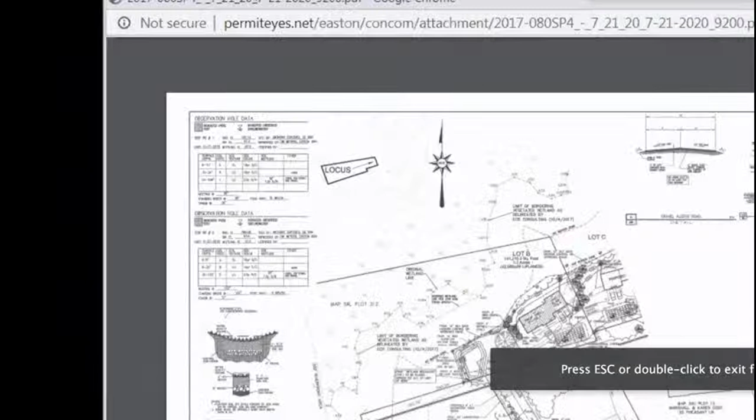As you mentioned, we had a conservation meeting back in January, but after that, we had a meeting with the Conservation Commission where they reviewed and discussed the plans, and we did a drainage analysis associated with the dam on the northerly lot. After review of the documents and discussions with the Conservation Commission, the commission agreed to let the applicant remove the boards within the dam structure. Those photographs and inspections occurred, and a letter was sent to the Conservation Commission, uploaded as well today, regarding that particular part of the adjoining project, if you will.

So as you mentioned, back on January 6th, we were before you with this particular project, and there were some issues. The project was continued once until we resolved the issue with the dam. So here we are back before you, and the issues that we did address that were requested was a cross section of the gravel access drive, and that was added to the plans as well.

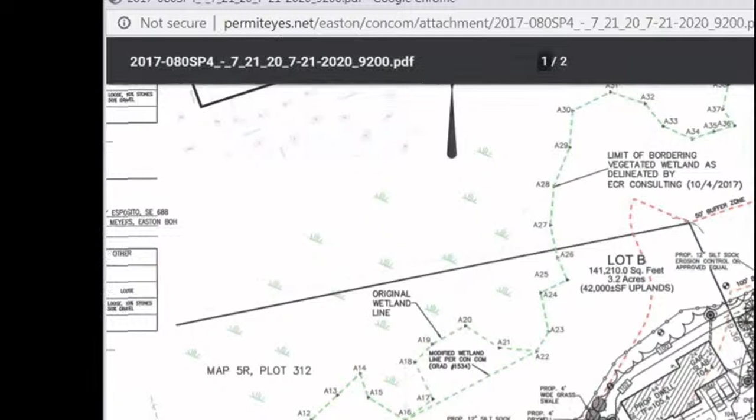There was a comment, I believe, that was made about snow storage areas, and those were added to the plan. Unfortunately, they are on the eastern side of lot C, if you will, so they're kind of at the end of the drive, and they got cut off on this particular plan. But the idea being that the snow would be pushed down the drive towards the end of lot C out of the buffer zone.

A bunch of work was done to create a bioretention area on the project that you can see there. Originally, it wasn't existing there at all. We added that, and then at one point we enlarged it a little bit to accommodate a bigger storm event. So that's been shown and designed to accommodate the increase in existing stormwater flows.

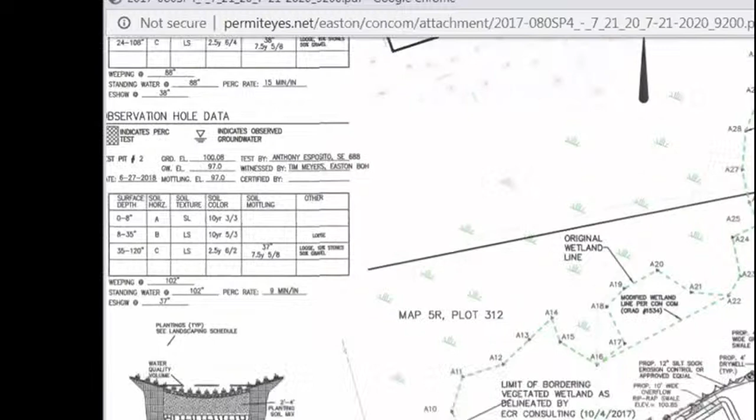And then one of the requests that was received that night was to do a tree inventory plan. We did do that survey, and we provided that plan to the commission. It should be noted there are 30 trees that need to be removed with the particular project here for this lot, 10 Gilberta Way. But we also are adding 13 trees back into the project, and there'll be additional plantings that will be installed along the proposed common drive next to 20 Pheasant Lane. So with that, I'd like to answer any questions that you may have.

Anybody have any questions, or is it just frozen?

I can't hear you. Yeah, I was frozen. Oh, okay, there you go.

So just as a bit of a summary here, we've got the stormwater addressed, the retention basin to handle some of the runoff as well, additional amount of runoff. The snow stockpile area has been designated, although it's not on the plan. It's described. And we have a description of the removal of the trees, as well as some of the replacement that you're doing as well there, which trees are remaining and which are being removed, and you're adding in some trees as well. Is that about it? That's it. Yeah, correct.

Anybody have any questions, Mr. Rogers? Well, I guess as far as the plantings go, and I'm assuming Carol's probably going to touch on this, just with some of the experience that we've had with plantings kind of going sour, particularly recently on some projects. Do you guys have any specs for plantings and making sure root balls and everything are at the correct depth, and there's the right soil and mulch being used around the plant bed to ensure success?

I spec'd out the botanical name and the common name of the plant materials and the sizes. If you guys need me to provide details along with that as far as how you plant the trees and shrubs, I certainly can do that.

So let me see if I'm reading this correctly then, Scott. The 4 trees that are being saved are the 2 over here, these 2 green ones. Correct. What are they? Those are oak. At what size? I believe they're 18. It's kind of hard to read the plan. I believe they're 18s. Okay, and then this one's being saved? Right, and that's a pine, and then this one. Correct. Okay, so the trees that are being saved have the cross hatching inside the circle? Yeah, exactly. Okay.

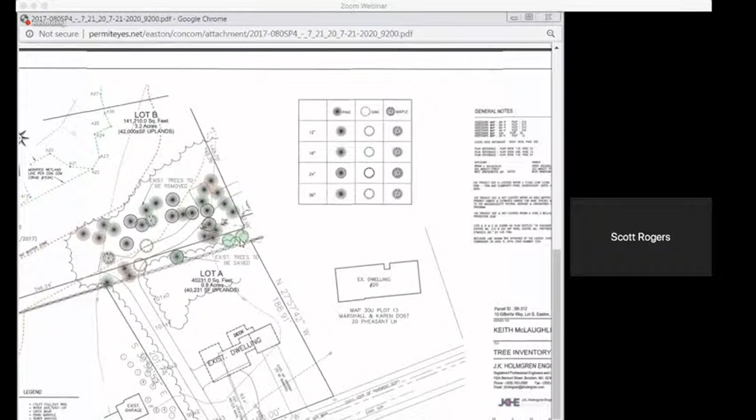Sorry to interrupt, Andrew, just wanted to clarify that. I'm looking at the plan. There's only 4, right? Correct. Any others being saved? No. Okay. I can add that level of detail. Okay, so, any other questions?

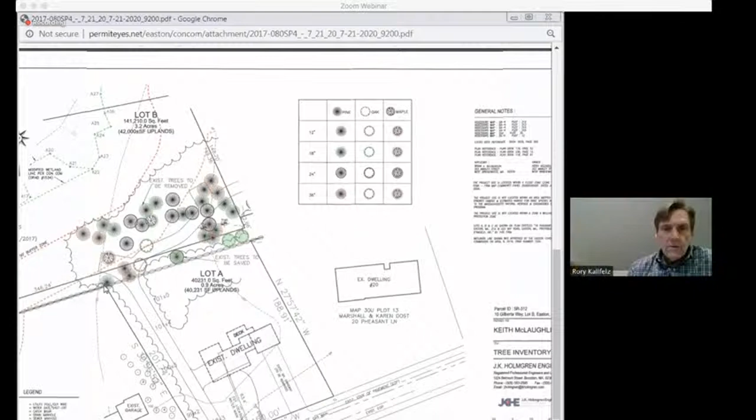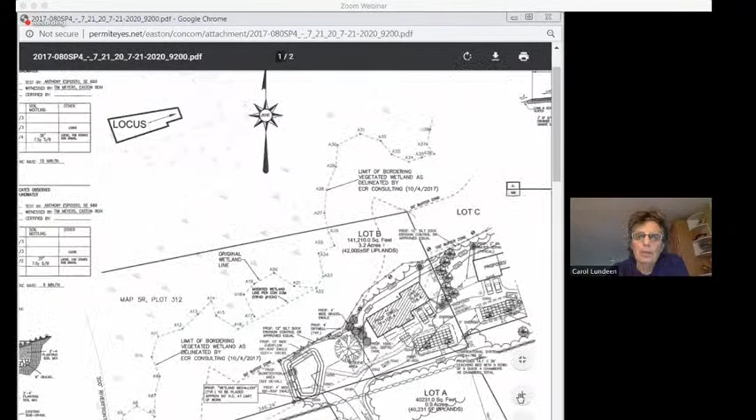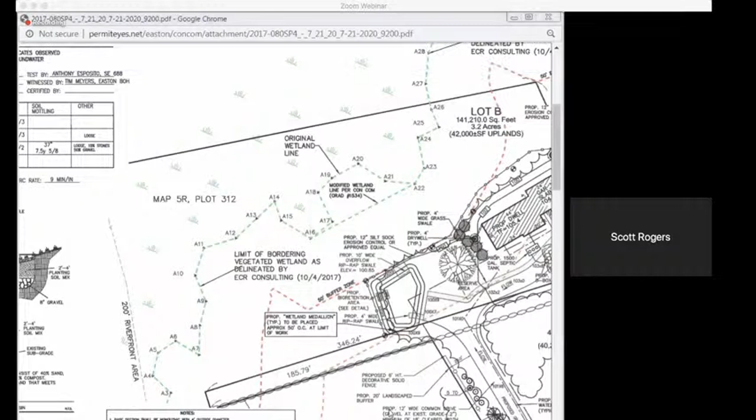Right, this is Carol. I'm a little rusty on this one. Do we have any shrubs going in or ground cover? So, first of all, Carol, did you sign a Mullins on this one? No, you don't need a Mullins on this one, okay, that's good. Making sure before we get too far. Go ahead. Right, so Scott, what do we have for shrubs and ground cover going in? So, in the bioretention area, we have some shadblow, some winterberry, sweet pepperbush, arrowwood, and sensitive fern.

Wow. And what's the maintenance plan on those? Monitoring? I would assume that, I don't know if it gets put into the standard conditions, but we'd have to plant at a decent planting time. And then I would assume the commission would want to see some kind of an inspection a year later to see if we had a survival rate. And if we didn't, we'd probably have to replace, I'm assuming. That's pretty typical, but I don't know if you guys put those into your conditions or not.

Right, so you're saying that you're not coming forward with a maintenance plan? No, it's a single family house. Right, okay. So anytime the soil is disturbed, anytime soil is brought in, there's a very high chance of exotic invasive plants popping up aggressively. And then there's the whole issue of getting these plantings established. I'd like to know what the establishment plan is, how they're going to be watered, especially now, even though the Massachusetts drought map that comes out on Thursdays has shown us not to be in drought. It sure seems like Easton has been missing a lot of the little bit of rain around.

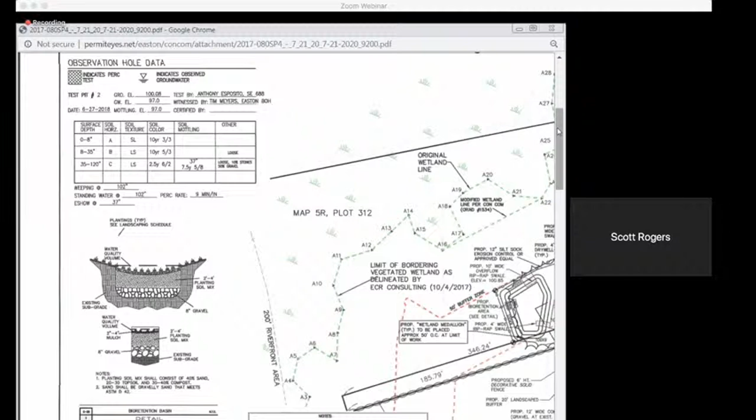So I'm really rooting for these plantings to be very successful, and they're going to need a lot of help to be successful. So I don't know the exact construction schedule, but even if we were to proceed this fall, we've got to get a permit from this commission. We've got to file for a building permit. We've got appeal periods. So at the very earliest it would be fall, and at the very latest, the planting would have to occur in the springtime. So we prefer to do it when there's better conditions than August 3rd to plant. Of course, yep. We'd all like to see that.

So I'm kind of interested in seeing an establishment and maintenance plan. Yeah, and I know my memory is a little fuzzy because I've been out of action for a few months, but I don't think that requiring maintenance plans is that out of the ordinary for this commission for single family homes and clusters of single family homes. Is that correct, guys? I think it would be appropriate, given the kind of planting they're gonna do.

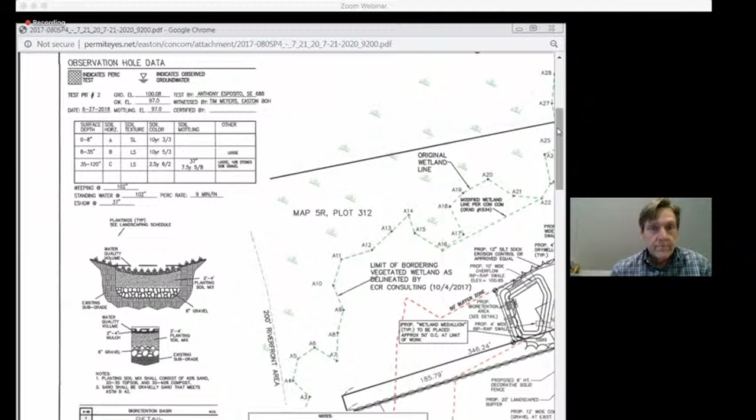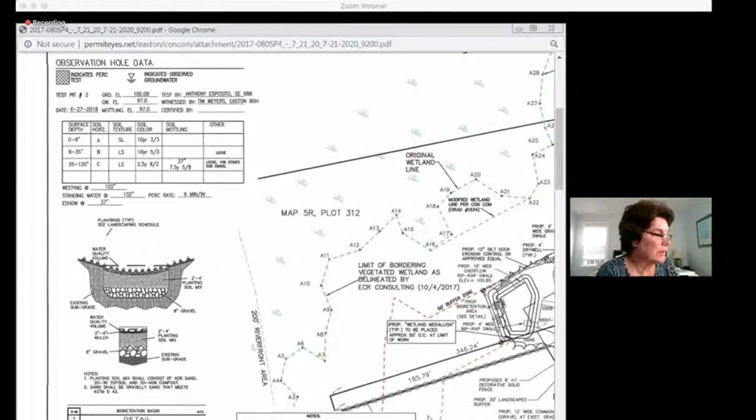Scott, I'm also not seeing, there it is. Okay. I'm gonna bring over the landscape plan details so that Carol and other commissioners can get a good look at it. I'll try to enlarge it because clearly I missed seeing it on the screen. Okay, so here's your schedule. There's your size.

Nice. This is the guy to ask questions of. He actually knows what he's talking about. Yeah. Thanks for bringing those forward, Andrea.

So, I think we should just have them give us an establishment planting plan and an establishment and a maintenance plan. Normally, do we look at it 2 years out, Andrea? Two seasons? Your choice. It's either 3 seasons or 2 seasons, whichever is likely to get 75% survival. Yeah, and we generally provide that, right?

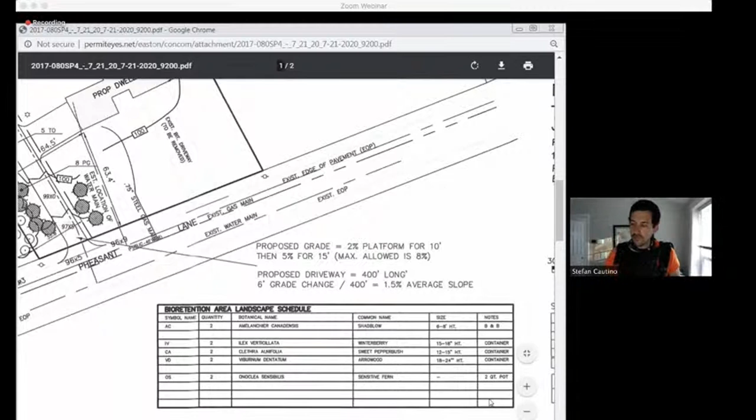The maintenance plan itself, and then I guess there's the question of do we want any specific plans around the actual planting of the plants, or do we want to reserve that for restoration areas and that kind of thing? Right, I agree. I would like to see a description of the planting methods that will be implemented.

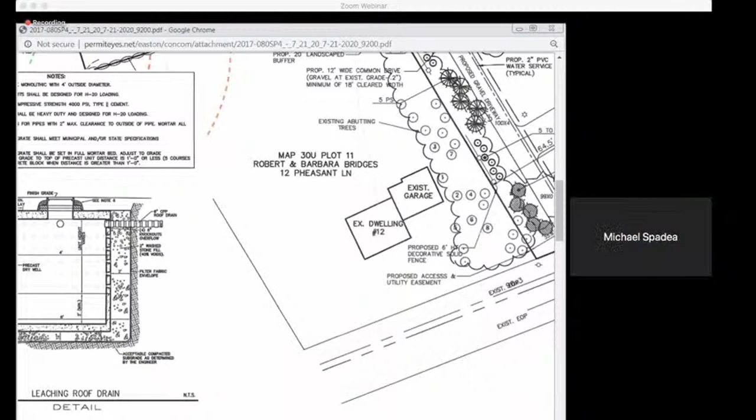Well, I think part of this is that they're on the hook for the survival rate no matter what they do. That's my approach, they have to be on the hook. Yeah, whatever plan they have, it makes no difference. Got to stay alive. Yeah, at least 8 of the 10 plants that they're planning on putting in there need to survive.

Yeah, so Scott, the discussion we're having now around basically showing a cross section of a plant in the ground, the right depth and mounding and everything like that, is because we've had a lot of plantings that have just been installed terribly. It creates more work for you guys, it creates more work for us, it eats up time on everybody's plate, and then you gotta go and plant more things. So it's almost like a fail-safe for you guys to make sure that whoever's doing the installation has a spec to work to.

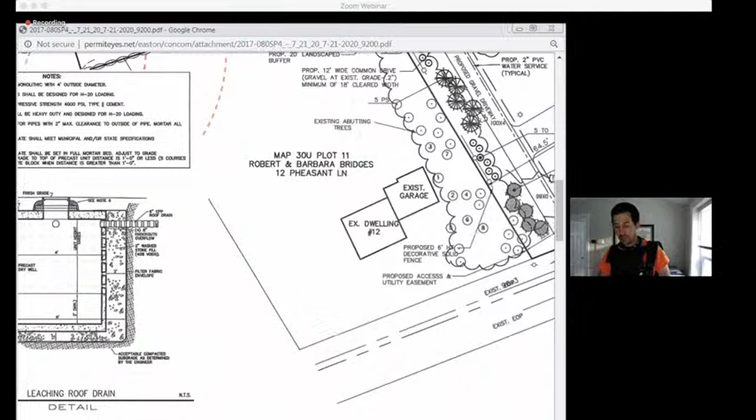I guess if you feel that the contractors you use are going to do the installation of the plants correctly, you're going to have to follow the maintenance plan. So, you're the engineer. I come from an engineering background. I like to have plans. But it sounds like the commission would lean towards leaving it in your hands as far as if you want to provide that kind of a detail.

You certainly could. And one thing I would like to point out is that we did do a set of plans for the planning and zoning board when we did the approval for the special permit on Pheasant Lane. So we may have already presented those details to the town, just not to your specific commission.

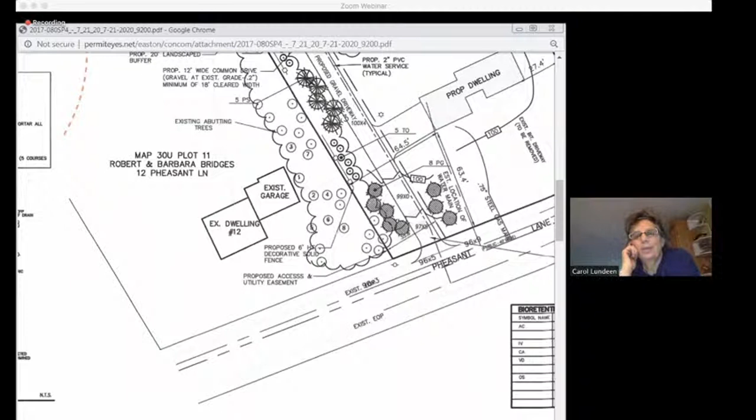Right, Stefan, I would like to add to what you were saying about the higher the survival rate, the less of everybody's time it takes up in the future. There's also the aspect that the sooner these plantings become established, the higher chance we have of having a functioning ecosystem. True. Good point. So that's also super important. For me, having an annual reporting feels kind of risky. I'd like to see more skin in the game, more active management in a plan.

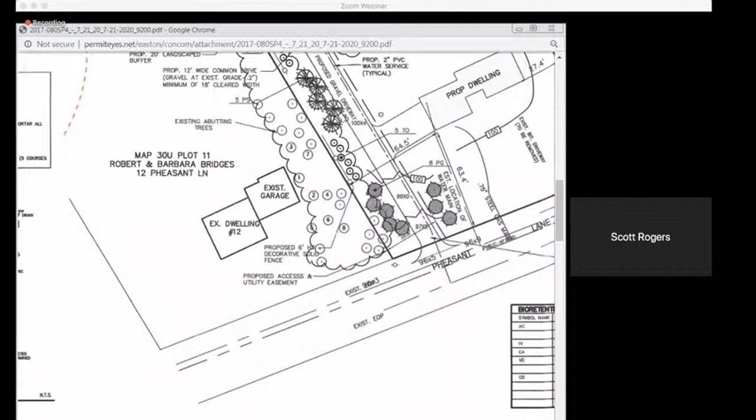So Scott, let's see what you can come up with. So is this something that we are doing on every single family house now? We're doing maintenance plans and we're monitoring things. Don't forget, I'm not filling in wetlands. I'm not even doing buffer zone restoration. I'm basically providing a bioretention area that's not required by anything other than the Easton Conservation bylaw, and we're doing it at the owner's expense for additional stormwater control, which is not really required.

But it is required by the town bylaw, so it is required. That gets glossed over a lot of times, and it drives me nuts. You guys work with different towns, but you're working in the town of Easton, it's a bylaw, it's a requirement in the town, even if it's not at the state level. And yes, it is something that we require regularly on single-family homes, the maintenance plans. This isn't anything out of the ordinary. All right.

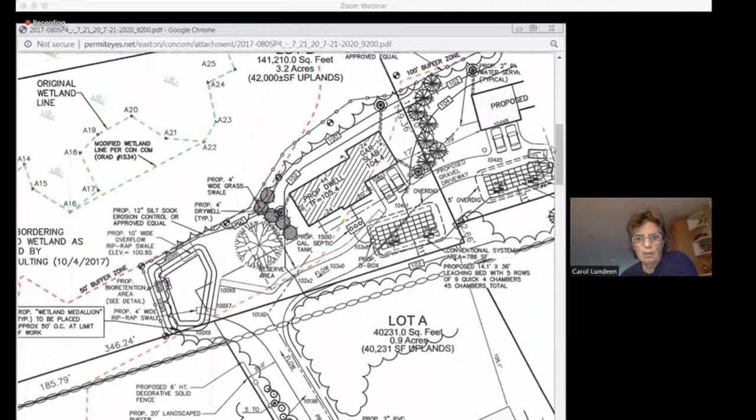Right, and in addition to the plantings in the bioretention area, we have new trees going in up in the area where the trees are coming out. Correct. Okay, so I'd like to seek some kind of report or schedule about those also.

Well, if we're doing the maintenance plan requirements, we can require that. So Andrea, typically we do annual reporting. Yes, they go in the first growing season. You often have a report on how the installation went, and then you often get a report after the next growing season and annually after that. Okay. But sorry, Carol, does that sound reasonable? We have a report on the installation basically a quarter later, three months later, and then annually thereafter.

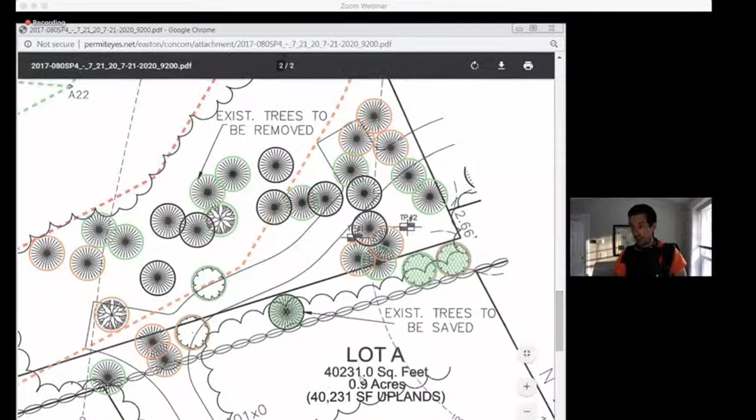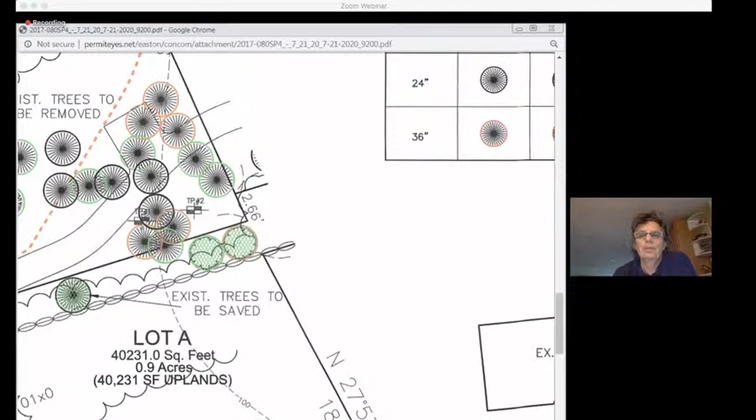Right, to me it doesn't seem frequent enough, especially during the first establishment year. I know, Scott, you were thinking of maybe doing planting this fall or in the spring. Anything that goes in the spring, if we have another summer like we're having right now, what I would like to see is new plantings irrigated with just a surface Netafim drip line on a timer, something like that. Just to show an investment in the restoration of the ecological function.

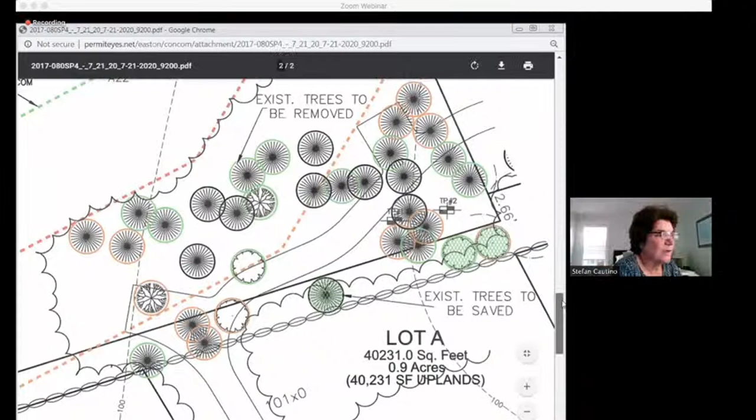Don, did you have a comment that you wanted to make? Yeah, I just wanted to reiterate that we only have jurisdiction within 100 feet of a wetland. So the trees that would apply would only be within our jurisdiction. Good point, John. I also would like to note that the shrubs are going in a bioretention area, so all the surface runoff is being directed toward them.

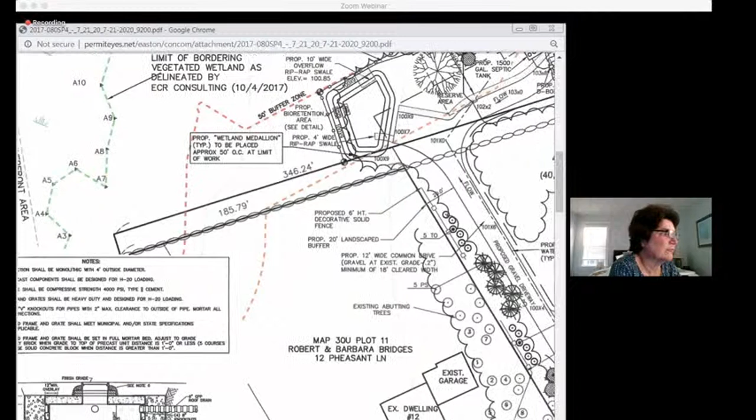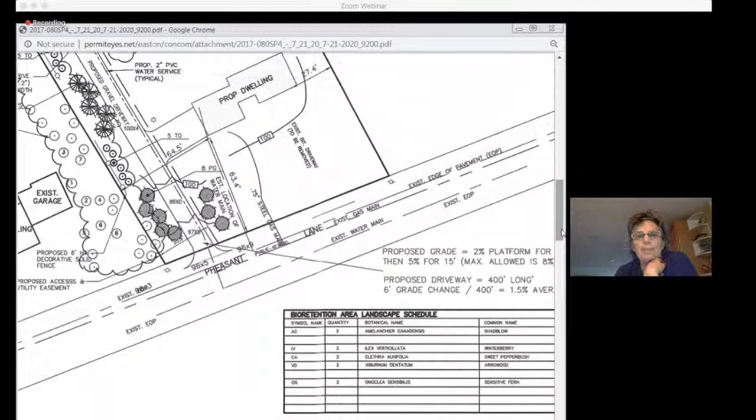Yeah, but also, thank you for all that. I'd like to see not just getting the plantings established, but what happens when the invasive plants come in. How will they be managed? I guess the one question we want to ask Scott also is if he identified any invasive plants out there. I believe Brad Holmes was the one that did our wetlands flagging. I don't believe he did note any invasive species out there. So no bittersweet, no Japanese knotweed. I don't believe so. Okay.

It's been a while since I was out there for the ANRAD, but I don't recall seeing any large patches or anything of that. It didn't jump out at me either. I'm not saying it's not out there, but it wasn't in some large area at least a year ago when the ANRAD came up.

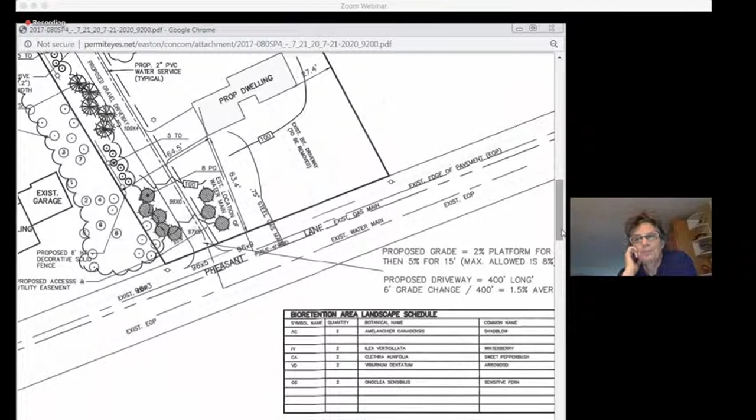Another thing that's come to my attention recently, I'm not sure what kind of soils will be used to construct the bioretention area, but on its surface, I've become aware that it's an option to bring in certified weed-free soil. So that's something that I would like us to consider. John, what are your thoughts about that? Weed-free soil, as in what type of soil are we talking about? There's some kind of certification process where the soil is tested and shown to be weed-free, weed seed-free.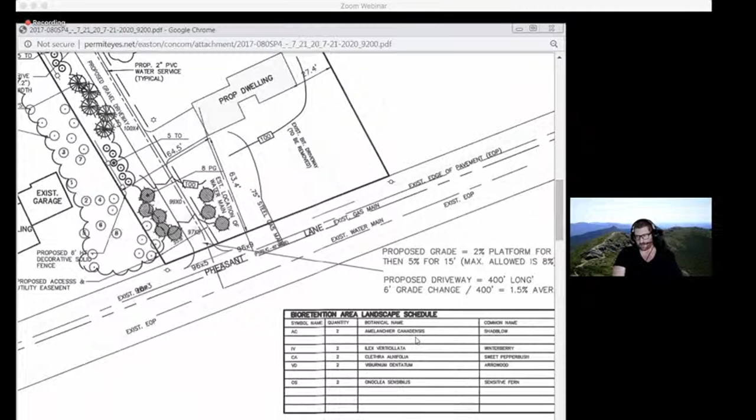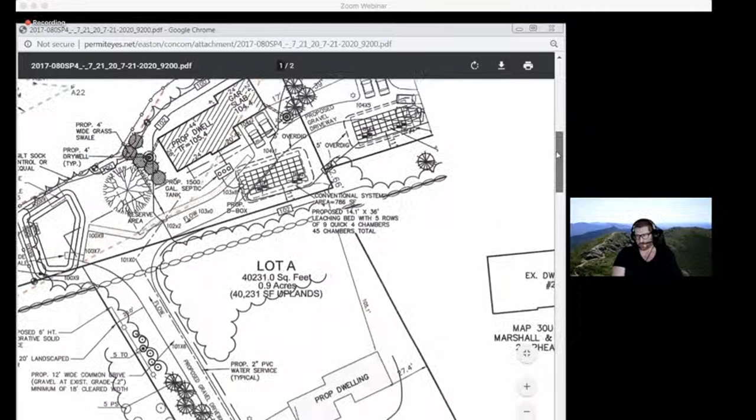How costly is that? That's a good question. How costly is that? How valuable is it? Is that something I want a single family owner to really have to fork over? If it costs thousands of dollars, I don't think that's something you can ask of the landowner. But if it was a large wetland replication area or enhancement area, I would say that would probably be something that we'd be more interested in looking at. Right. I appreciate we don't want to burden homeowners, but we also want to have a high functioning system as soon as possible. I understand. It's easier to maintain.

So my thought is that we need to either condition it or put forth in written form on the plans a planting plan and a maintenance plan. I don't believe that I need some of the more detailed things that we haven't done before being suggested here with this particular project. So I think the annual maintenance plan that we've always done is sufficient from my perspective. So.

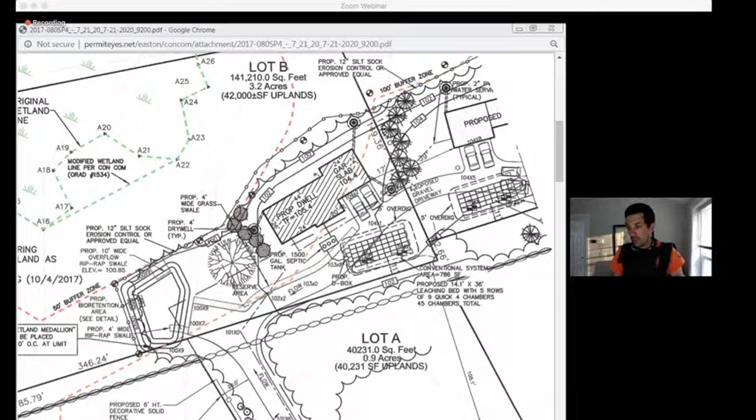I'd be comfortable leaving it up to the applicant, just knowing that they have to meet the maintenance requirements. Leaving the plan as is for that, and I'm okay. Personally okay with him adding that detail and getting it to Andrea post approval, getting the permits pending, adding that detail and getting it over to Andrea. Okay.

So let me see if there's any public comment for this particular project, you can either raise your hand or use the Q&A box. Hand raised, promoting to panelist, Ms. Hooker. Okay, Ms. Hooker, you can unmute yourself. Can you hear me okay? Yep. Okay. So Pheasant Lane obviously still a huge concern with the water. Just for the public record, can you identify yourself? Oh, yes, sorry. Erin Hooker Thomas, 4 Pheasant Lane. Thank you. Go ahead.

So obviously still a concern with the water. Now that we have the elevations of what they have on Brentwood, Pheasant Lane, I had my elevation certificate and I'm happy to share it with you, Rory, and everyone else. My elevation is 160.40. What was that? 160.40. Do you mind sending me a copy? Absolutely. Actually, I'll do it on my phone.

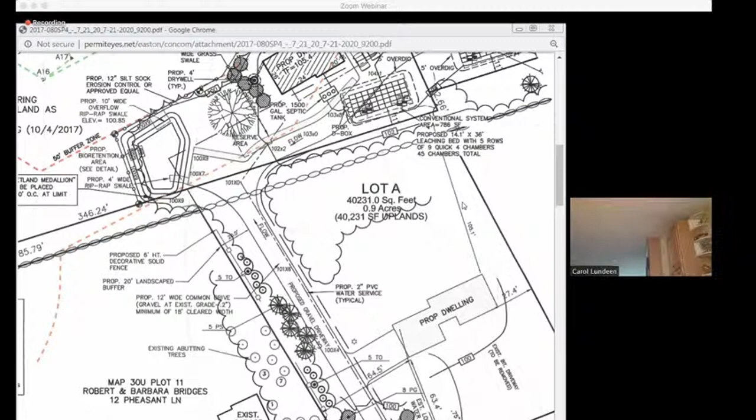If you recall at the last meeting on the dam, she made reference to the fact that she had an elevation certificate from FEMA, which caught me as odd because on their own FIRM maps the area is considered outside of flood zone. Do we have topos on this? We don't, right? Did we ever ask for topos? Oh, we have topography shown on the plan. Which version? Show it to me. Oh, it's a very light layer in the PDF. Very, very light.

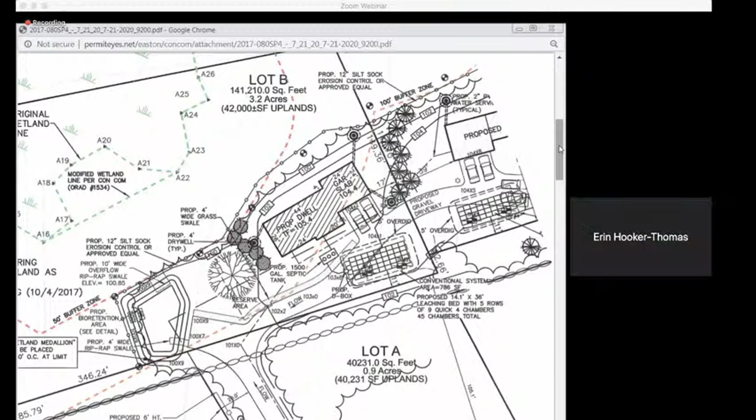Whoa. Is this an assumed datum? It is. So this isn't tied into any sort of NGVD or NAVD datum. It's not. All right, Andrea, I just sent it to you. So an assumed datum with land subject to flooding nearby. You might want to have some sort of calculation as to how to compare the two.

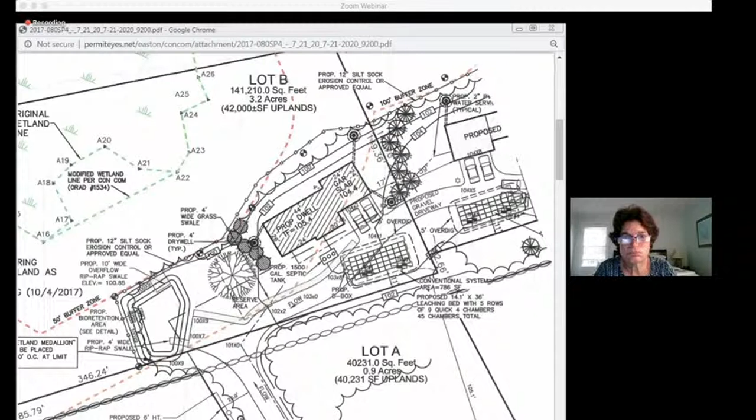Yeah, because I'm kind of concerned that we are significantly low, and then we're taking out 30 trees on top of that. I already showed you the picture that we have a lot of water that comes from that uplands. And now I'm really concerned because we have the boards being removed that were X amount of feet, and now more water from trees being removed coming down our direction. I already have a French drain. I can't do much else to my house.

So just to clarify, the boards resulted in a little over half an inch elevation change in the water, not feet, and it is 1,500 feet away. I just want to be clear on the record. I'm not minimizing the water problems in this neighborhood because it is an absolute issue. Right. And I'm just concerned because we are 15 feet lower than that area. What's that going to do to the water coming in our direction? Well, did you say your elevation was 160? Yep. Or are you referring back up to the dam at Brentwood?

Yeah, the dam at Brentwood, they had elevations of 176 down to 174, but my elevation's 160, anywhere from 160 to 166. I'm a little concerned that we're so much less, and that would make sense why we have water that just sits on our street even days after it stopped raining, which causes issues obviously in the winter. And now we're removing more trees to send more water down to our street.

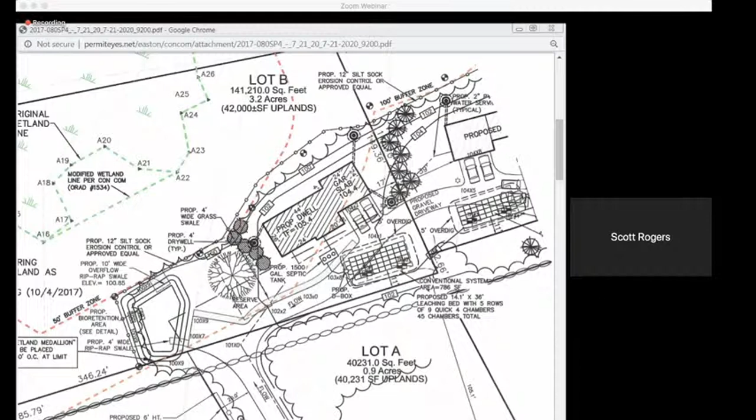Did you say you're up at Ramblewood? Ms. Hooker Thomas, I think, are you at 4 Pheasant Lane? I've lived at 4 Pheasant Lane for 39 years and watched the culvert fill up and back up. And now I feel that this is going to make it more of an issue because we are at a lower elevation than the uplands.

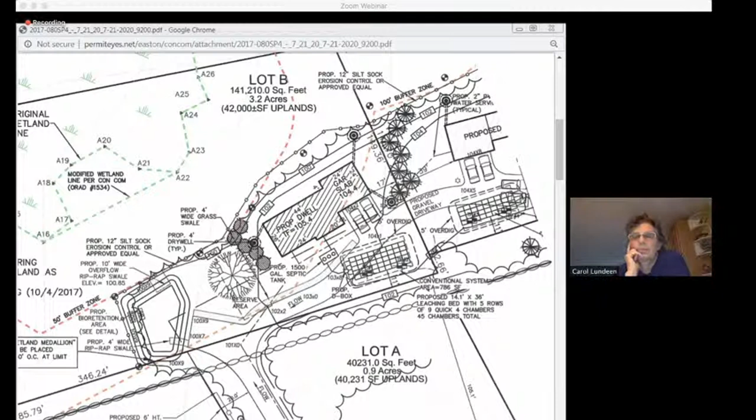Stefan, I'm just trying to figure out the elevations. The plan shows the elevations at like 100. Right. Hers is at 160. So I'd have to have Greg reference it, but yeah, the elevations are anywhere from 160 to the highest, this is above the ground. So my house starts at 168. That's above the foundation. That's where my house starts.

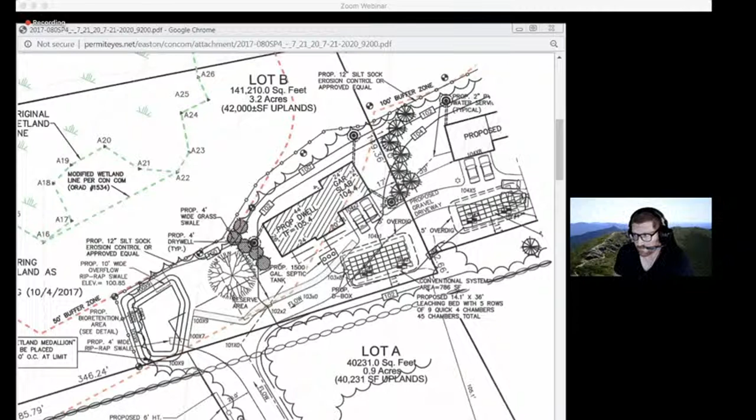Rory, just to clarify, this plan is not on any datum. It's assumed datum. So what you see for elevations here isn't going to relate to what Ms. Hooker Thomas is talking about. How do we use that piece of data at all? We can't. We can't make the correlation without the plans on the same datum. So the applicant needs to provide us information on that datum to prove basically that it's not going to have any impact to the down-gradient person that's on the call.

What would the standard datum used be? The standard datum would be, for instance, to check the FIRM, you could have it either on NGVD 29 or NAVD 88. And I don't remember what the FIRM maps usually use for a datum. It's been a long time.

I might have to email this to you because I'm having trouble moving it from one system to the other so that I could put it on the screen. But the elevation certificate acknowledges that there's no base flood elevation and that she's in zone AO. Using the same FIRM map, it says that it's NAVD 1988 datum. And if there's no FIRM elevation, I'm confused. They gave a whole lot of information on the building elevations.

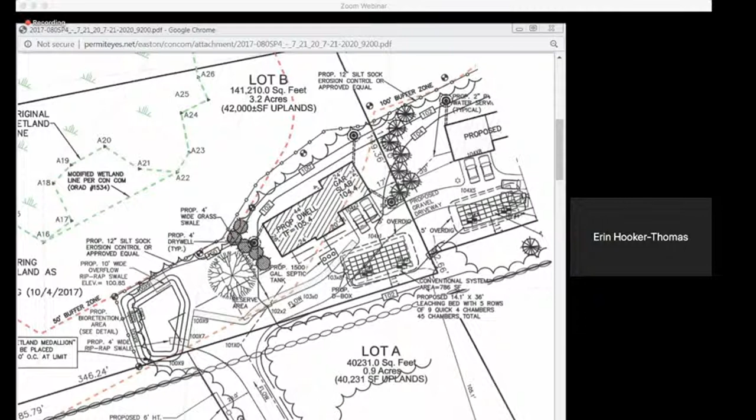Yeah, because they were saying that the back left corner of my garage was in a flood zone. That's why I was paying flood insurance. So I had an engineer come out and record all the data and send it to them. And we finally just got out of a flood zone last month, at the end of July. So the certification gives a benchmark utilized, and used the same NAVD 1988 datum.

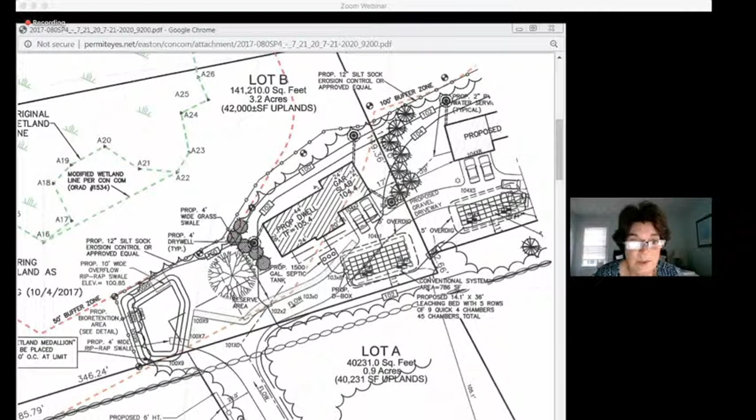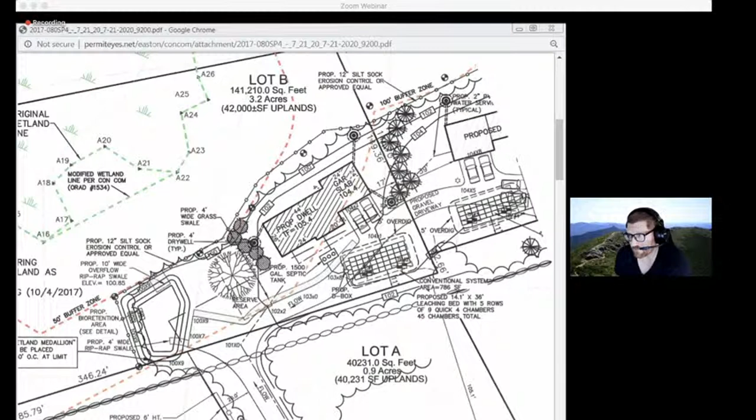So I'm thinking that it would be, is this for Pheasant? Information, yep, for Pheasant. Okay, so how far away is 4 Pheasant from this location? Two houses over. Okay, so I'm thinking that, to kind of wrap our heads around this, we can ask the applicant to confirm that the elevations are not going to be an issue, and get them on the correct datum for us to really evaluate and assess this further, using that benchmark that was recorded on 4 Pheasant. And I will send that to Scott.

I don't think you want me to post it online, do you? Ms. Hooker? Oh, it's fine. I mean, the data is the data, so that's fine.

So the other thing, of your larger scale plan. Which one is your property? 4. 4 is this one. So yeah, it goes the house that they're gonna tear down, then it's the Bridges, then it's Walters, then it's mine, going towards Bay Road. Yeah, and then there's one between you and Bay Road. Yeah, 224 Bay Road. Right, and that's where the culvert is. Okay. So you're a lot closer to where the mapped line of the flood zone is located.

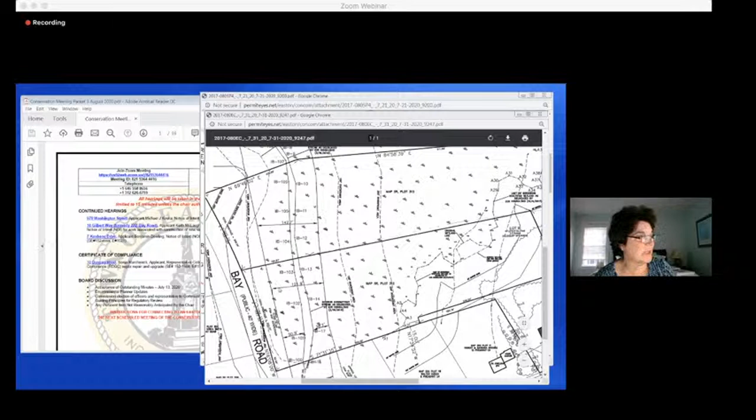Thank you. Okay, so here's the flood zone as identified on the FIRM map. You can see it best by the distances off of the stream. Here's Erin Hooker-Thomas property, and here's the property that's being developed. Is that correct, Scott? That's correct. And just for the record, to give context, we're about 437 feet away from the floodplain.

So where do we want to go from here? Suggestions from anybody? Well, I certainly would like to have elevations that we could compare to something standardized. I guess I didn't realize that we had elevations on here that we couldn't necessarily compare to a standard state map, let's say. So I'd personally like to see that.

Scott, do you have any calculations that show the bioretention can handle the difference between the trees removed and the trees being planted, as far as any standards for what trees can suck up as far as water? So what we did was we analyzed the existing watershed and looked at the peak runoff rate heading towards that particular design point. And then we looked at the post-construction watershed, which consists of a gravel area, grass, less woods, because there are trees coming out. And then houses will be taken care of through leaching basins.

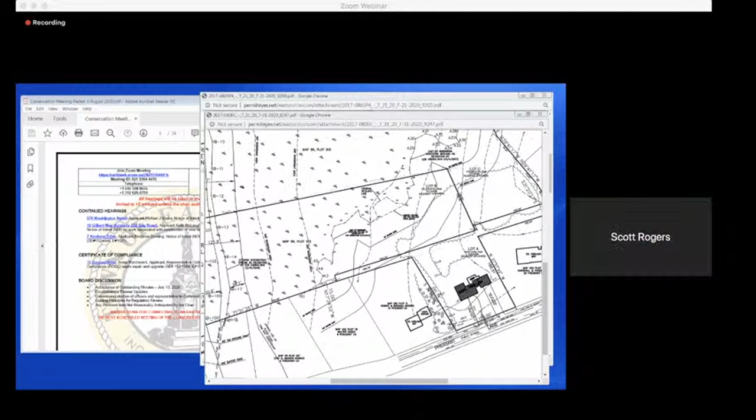Okay, so Scott, do you think it's clear what we need, and how quickly do you think we can get that? Because we have another meeting on the 10th. A week from today? Yeah. I'd probably defer to the next one if that's possible. Is that the 24th? 24th. Okay, well, I want to leave it up to you, Scott.

Just for the person taking minutes, can you clarify what you're asking for as additional information? We want standard datum for the topo. We want to see calculations for the stormwater runoff at the standard storm events, calculations pre and post construction. And we want to have,

we'll give you the suggestion that you put on some details for the planting so that they have the best survival rate possible. Whoever your contractor is doing the work, you might as well include it on the plan, just the maintenance plan for those plantings. So that we know that you're gonna give us an annual report for 2 years, 75% survival rate.

Did I miss anything? Snow removal. Oh yeah, make sure we have details of where the snow storage area is in Lot B. Right. Ms. Hooker brought up her concern about taking down large trees and the volume of water that large trees take up every year. Is that something we want to address? So I think that'll be addressed in Scott's calculations showing the current state and then the proposed build state.

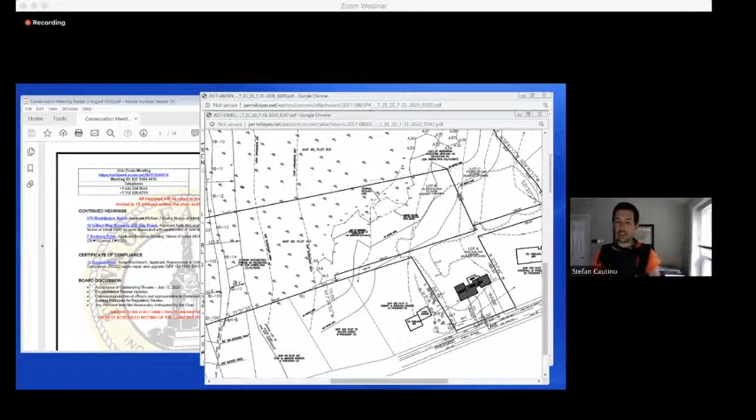I just posted the elevation cert that we received 3 times to PermitEyes. But you aren't going to know that because I'm getting rid of 2 of them. Okay. But it's now on the record. So do we have any additional public comment for 10 Gilberto Way?

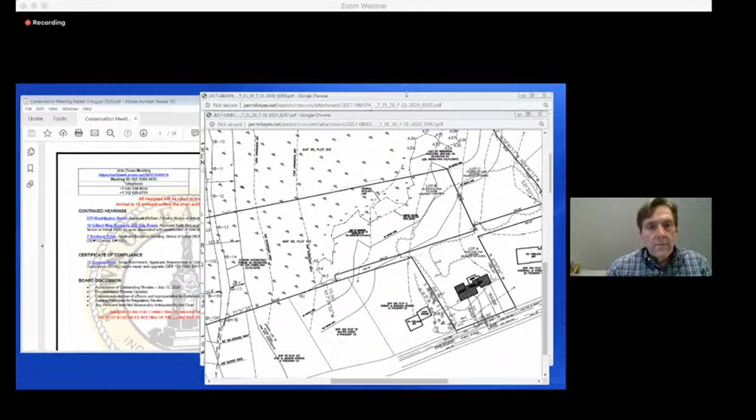Okay, so seeing none, I am going to make a motion to continue 10 Gilberto Way to August 24th. Second. All those in favor, roll call. Yeah, Cotino second, exactly. Roll call. Caulfield's aye. Lundin, aye. Spady, aye. Thomas, aye. Cotino, aye. Okay. So we will see you on the 24th, Scott. Thank you very much. Thanks, Scott.

Thanks. So the next one up, you want to take over here, Stefan, or what? Oh, it doesn't matter. You're rolling. I think I like watching you work. You're doing good. Okay. I'll get my critique later.

Nice try. 7 Kenbane Drive. I think this is Mr. O'Shaughnessy's here representing the applicant. Do you have anybody else with you? Yeah, Garrett's here too. Yes, sir. Can you hear me, see me, whatever? We can hear you. You want me to promote? I got him promoted and now Garrett. And Kathy Humphrey is here, but I don't know if she wants to be part of the public or just be an observer.

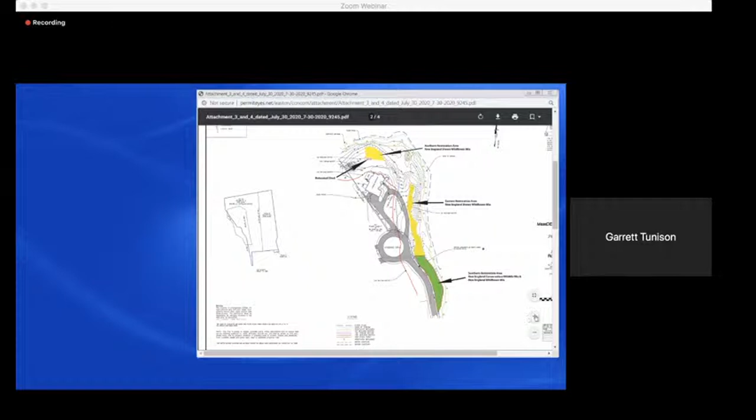Yes, right there. That's where the shed would be relocated, which will be a few feet outside of the 50-foot buffer zone. So we're going to pull it out of the area, and then that area would be marked by the surveyors as far as the 50-foot buffer zone. We would rototill that area and then seed it with the New England showy wildflower mix. And we'd also do the same for the eastern restoration area.

So the other area that we have, which is the area that was previously earmarked for ecological restoration, is to the south, and it's in green. In this area there currently are native ryes and fescues, native grasses, and there were a few asters, looked like some goldenrods, so we had some native plants already there. I think in this area it would be best to mow down to approximately 2 inches instead of rototilling it, and then apply seed, which would be New England conservation mix and also New England wildflower mix.

Because the New England conservation mix has a lot of plants that provide seeds to a lot of the bird species, but the wildflower mix does as well. So I thought we'd mix both of them, and it would kind of go along with the theme of the showy wildflower mix above. But we also wanted it to look somewhat natural.

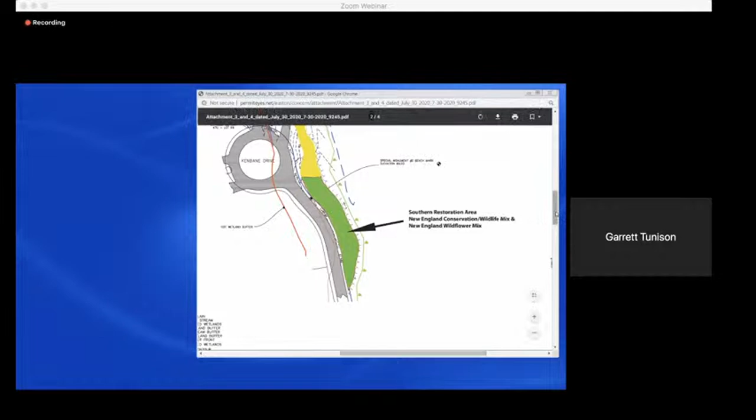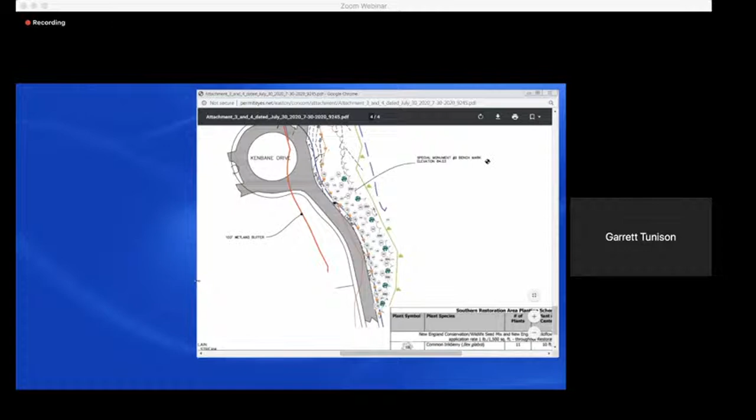So what we're proposing is to plant 41 shrubs consisting of sweet pepper bush, high bush blueberry, witch hazel, and inkberry. Now the inkberry would be located along the western portion of the restoration area, which would more or less just mark the edge of it, and it would give it some landscape plantings effect, but it would still be natural. And then we'd use the sweet pepper bush integrated with the high bush blueberry, to the larger shrubs, which would be the witch hazel.

And we also provided 13 trees, black cherry and red maple intermixed along the eastern portion of the southern ecological restoration area. Now, all of these are native plants that I identified while we were on the site, except for the inkberry. And I wanted to also mention for the other two areas, the northern and eastern, we would put down weed-free straw once it's seeded to help protect the seeds, since we're going to rototill. I felt that wasn't necessary in the southern area if we cut the herbaceous layer down to 2 inches and leave it.

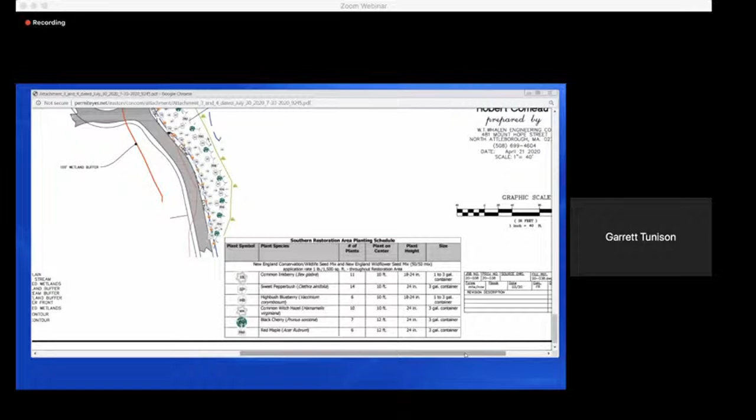Also, another note, we would delineate the edge of the conservation areas, all 3 of them, with permanent markers, and they would consist of a brass survey medallion located in the middle of a 6x6 landscaping timber that is installed vertically into the ground. Now, I've seen it done where you could use the 6x6 landscape timber by itself, or when you dig out the area, you can also put a bag or half a bag of concrete mix in the hole when you put the timber in.

And it's set approximately 14 to 18 inches in the ground, and it sticks up approximately 1 to 2 inches above the ground. So you can see it, but it's aesthetically pleasing instead of having a large post located along the whole edge. And also, what was my other comment? I think that's it. Does anyone have any questions?

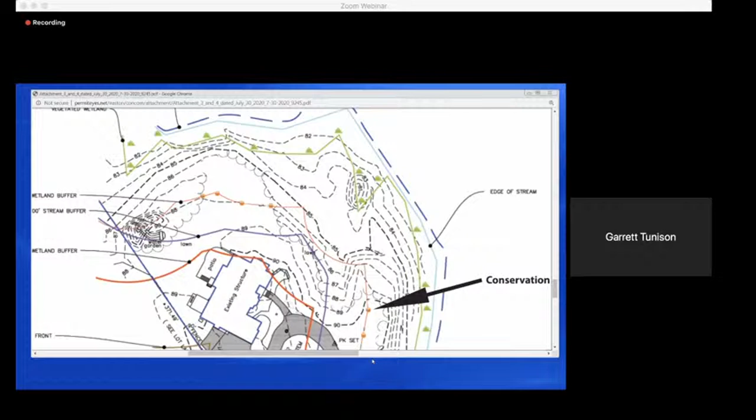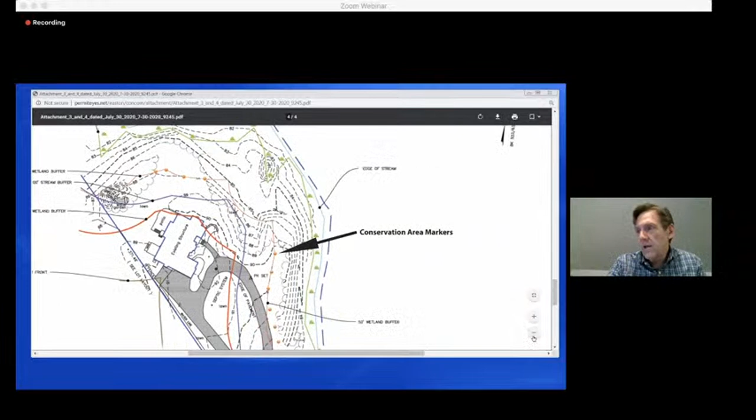So the initial question I think we asked for last time is, what is the square footage of the area of the driveway that was not on the original plan? Of the driveway, I did not calculate the driveway. I'm only looking for the part that is within the 100-foot buffer. So I mean, it probably is. I mean, I'm just guessing based upon something. I mean, it's probably... shouldn't guess.

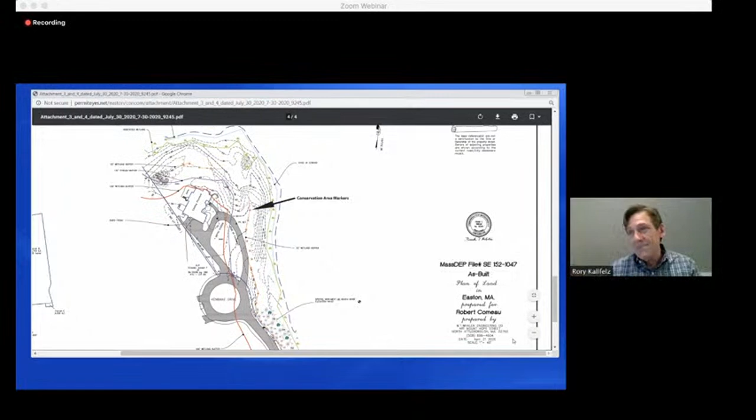Yeah, I'm actually looking for distances myself because I didn't calculate. I knew you asked for it, but I was pretty sure it was less than the 20,000 square feet he was offering. There's no question it's less than. I think it's probably even less than 10,000 when I look at it. I'm taking a wild guess, but I'm not the expert here. So. The plan is at a 40 scale.

I guess one question I have for Garrett is, did you happen to do any soil investigations while you were out there? I didn't really dig anything up. I looked at the surface, but that was it. Okay, what did it look like out there? Because I haven't been out there. It's a sandy loam. Okay. I didn't really get too much of the color because it was on the surface. I just kicked it with my foot a little bit, scratched. Mhm. So it was a sandy loam.

Would you say it kind of looks like Windsor? It could be a Windsor. Okay. Yeah, because I'm looking at MassGIS Oliver right now. It looks like there was a lot of Freetown for the wetland. Yeah, it's definitely not Freetown. Yeah, that's what I came under the impression of as well. But I'd be interested to see, because some of those plants that you're suggesting need that kind of... I know you said you're going to till it. How much are you going to till it?

I would till well for the seed mix, the straw will break down somewhat, but you're right. There is an A layer that's there as well. So the A layer should have enough nutrients for a wildflower mix. Right, and I understand for the seed mixture. I'm thinking about the plants. You're thinking for the shrubs. Yeah.

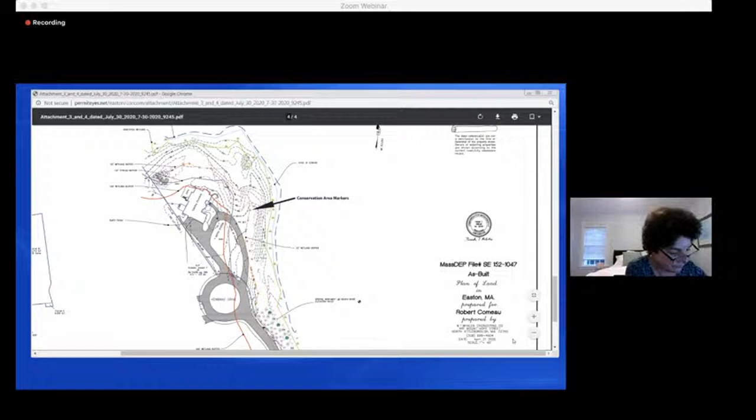As far as the monitoring, I would actually be on site. Why don't I go from the planting? I would actually be on site to make sure that the plants are located in their proper location as shown on the planting plan. I usually set the plants myself at their planting location. If it's a crew that I have not worked with in the past, I will go through the proper planting depths to make sure that the plant isn't too deep or too shallow.

I also inspect once they bring them, either if it's a nursery truck or if the landscapers go and get the plants themselves. Once they arrive, I count each species, make sure we have the proper number of plants per species. Also, I evaluate the health, see if they were beat up, if I see any insect infestation or damage. So I look over the plants before we do anything with them, and then when we count them, we actually separate them into each species and put them aside so they're easier to pick up from that species group to locate into the planting area.

The next step, once they're planted, we go through, make sure they're watered, make sure that they don't look too shocked or stressed, make sure each one has several. We have to do it with 5-gallon buckets or watering cans, make sure they get several containers per plant prior to leaving the site for the end of the workday.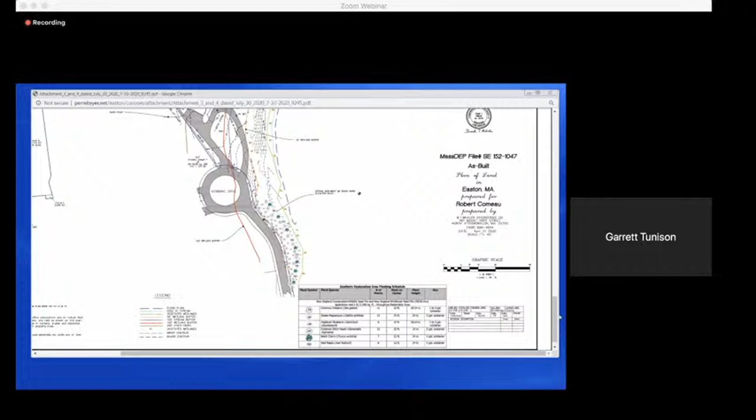I also don't only evaluate with a sample plot. I evaluate each entire area. I take a lot of photos from the plots and overall views of the restoration areas. So that's what it would consist of. Okay, I think we got that covered. So that driveway area was, based on my rough calculations, 7,000 to 8,000 square feet. And we're providing 20,000 square feet of restoration, Garrett, is that right? Yes, that is correct. Great. Yeah, I would guess it was around that number somewhere.

Thank you for that. The one other question that came up, and I know it was addressed with the Board of Health, and it's really not our area here, is that the driveway does go over the septic system. And I'm a little bit concerned about that. Right. Andrea had sent me some correspondence that had been sent to Kristen at the Board of Health, and there's a couple things. Number one, I would be concerned if the leaching field was in failure. It's not. They have a Title V from June that shows everything passes Title V. So I'm comfortable in that respect.

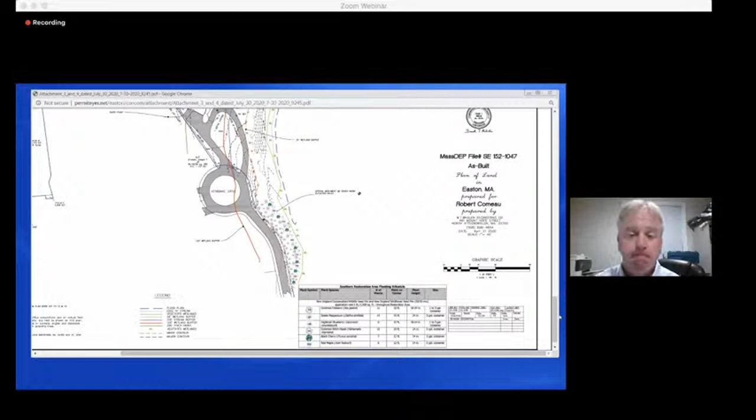The other component is this is outside of the 100-foot jurisdiction. So that's really a Board of Health issue, not a Conservation Commission issue. But for the passing system, I think it's okay. I don't see any issues. It's been there for 14 to 15 years. Hasn't failed yet. I just don't see any impact from the driveway. It probably wasn't the best way to do it, but it's not in failure. Any other commissioners have any questions, comments? No, I have nothing. That was great.

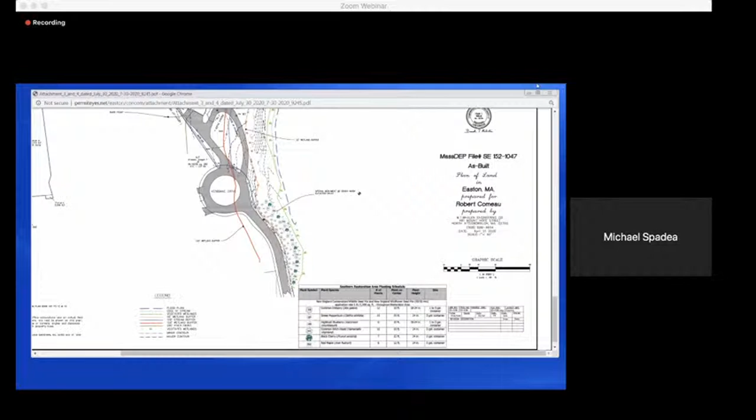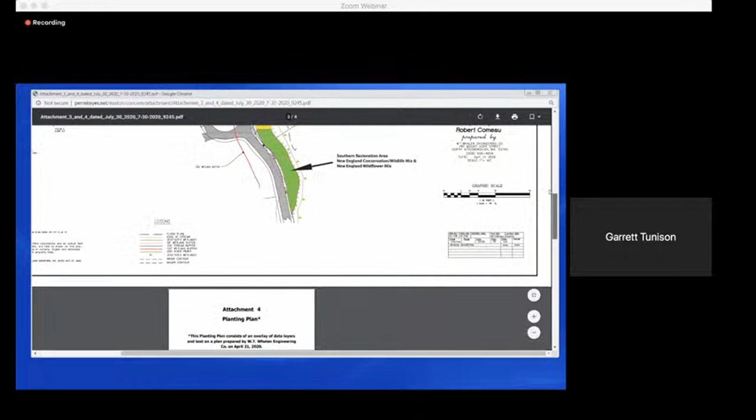Questions, concerns? Carol, you're on mute, maybe? Yeah, got it. So a few questions. Getting back to John's question about soils, the more northern area, basically you're wanting to make a meadow there, is that right? Yes, we would plant showy wildflower seed mix in that area. Right. So in your experience, how long does it take to really get a successful meadow established? Well, in our current situation, under our plan, we would do seeding this fall, and then we would seed it again in the spring. Usually if you seed it a few times, it'll start to go.

This seed mix does pretty well. It depends. I've had some clients just throw it in and not do any preparation, or an area where the topsoil's been completely decimated and they really didn't use much topsoil, out in the open in very dry areas with a lot of sun exposure, and I've seen it not do so well. But in areas like this, where we have an A layer soil, and we put the straw on it, and if it gets watered, it should do fine, especially after 2 seedings.

Right. So there probably used to be an O layer there. So why is a meadow a good restoration approach? There probably was an O layer, but even in a lot of meadows, I don't find an O layer. I do find an A layer. It could be 6, 8 inches deep or deeper if it's plowed, an AP layer. But I don't typically find an O layer in meadows. Right. But that is so close to the 50-foot buffer that it's not very common to see a natural meadow that close to a buffer, is that right? What I'm getting at is why a meadow and not trees and shrubs that would more closely mimic what had been there as far as a functioning ecosystem?

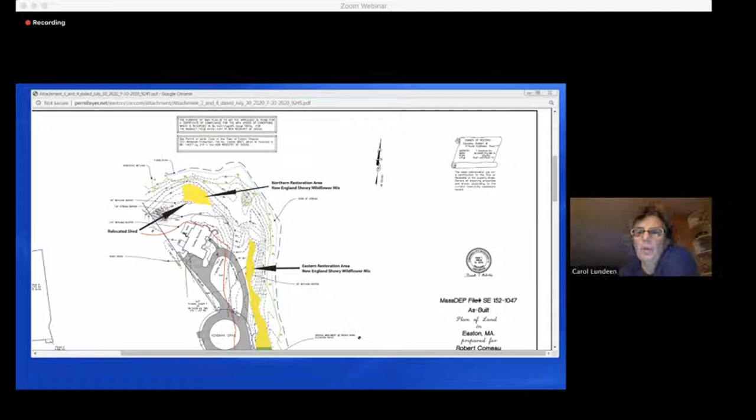Sure. You can put it in your order of conditions that it would be done constantly thereafter. But that's the only thing that I could foresee. Right. Thank you. You're welcome. What about watering? You talked about using watering cans or 5-gallon buckets. Yes, that would be on the herbs and the shrubs and tree species. Right. So where's that water coming from? The home. By a hose?

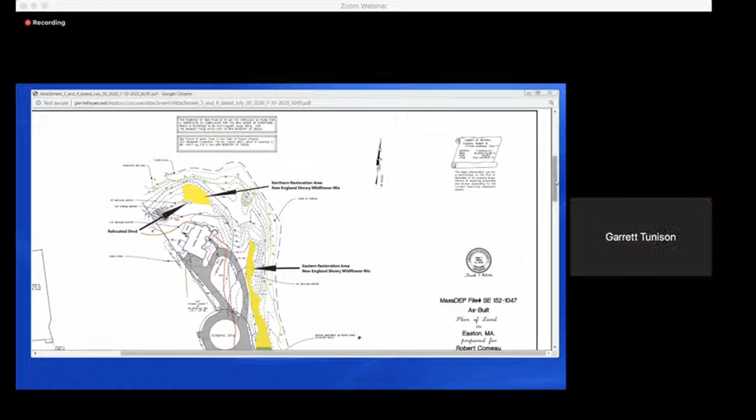It's a ways away from the home. Yes, but there's only 31 shrubs and 13 trees, so that can be done in an hour or a couple hours of watering of that area. Okay. With a 5-gallon bucket running back and forth to the hose, 31 trees and shrubs. I don't know of a water source down there, so that could be an issue. Right. That's what I would suggest.

Usually, if it's a landscaper doing it, they throw them in the back of a pickup truck and drive them down if they don't have a watering truck. Some have a watering truck if it's a large scale operation. So how does it sound to make a plan about that? I think it's going to depend upon the landscaper. That's why it's not included. We have to find out who we're working with to make that determination.

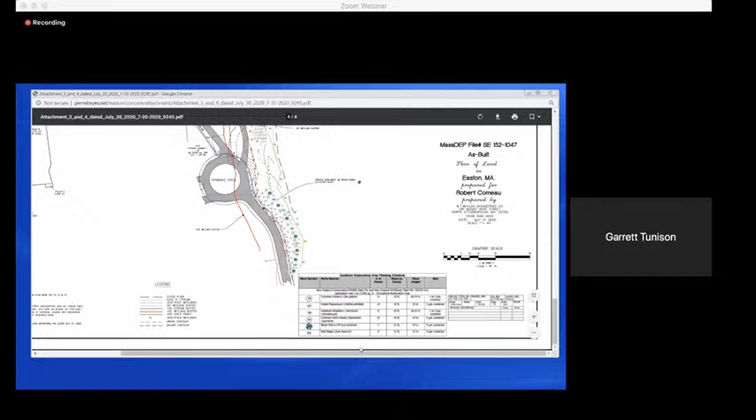Okay. I also noticed in the design of the shrub and tree layout, it's very linear rather than having, let's say, a clump of 3 inkberry and a clump of 3 clethra. I'm just curious, that's not random like nature is. So why do you have it that way? With the inkberry, the Ilex glabra, that was done to delineate, in addition to the markers, the edge of that ecological restoration area. That's why there's a row of those along the front.

As far as the sweet pepper bush, that usually likes a little bit more sunlight, so we kept more of those along that edge as well. Whereas the highbush blueberry is not as light dependent, and especially not the witch hazel. That can grow well under a pretty dense sapling and tree layer. So that's why it was done that way. And it was also because it's larger going back in size into the tree line. Right. So they're established in heights. Okay.

It's interesting when you were saying that Clethra wants more sun. In the woods that I frequent, there are a lot of wetlands, and the Clethra is blooming right now, and it grows in pretty wet places. Oh, it does. It's a facultative species, but if you give it a little bit more sunlight, its flowers are much more brilliant or prolific. Okay.

So one thing that I would like to see in the mix is black willow, because that is a keystone plant. Black willow, though, that's a pretty wet plant. This is a pretty dry area. Okay. Do you have, go ahead. Sorry. Do you have a native willow that would do well there?

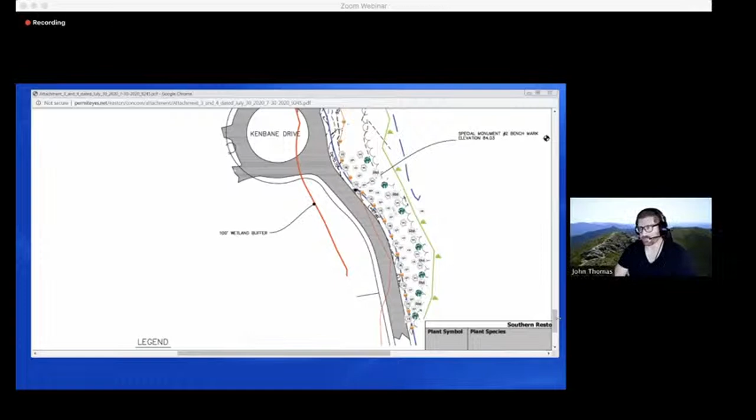I don't know. I don't know of any willow that's going to grow in this kind of environment. No. Sorry, Carol. That's tough. I think we're on the edge, even for the red maple. I think it's going to be tough because it is a sandy loam soil.

Right. Okay. And the only other question, maybe this is too detailed, but I think it would be great to mulch the trees and shrubs. Would that go in an order of conditions, or is it just... That would be fine. That's what I mentioned. It either would be mulch or weed-free straw on top. Right. I saw the thing about the straw, but mulch is usually 2.5 to 3 inches.

Yes. I didn't include that with the shrubs or the trees because I want to find out what the landscaper typically can use, and I want to make sure it doesn't have any invasives in it. So I want to make sure wherever they're getting it from, whoever their supplier is, it's decent stuff. Right, that's important. And you mentioned that earlier in the other hearing. That is the biggest problem that I find, invasive plant species being introduced through soil or mulch. You bet. Big problem.

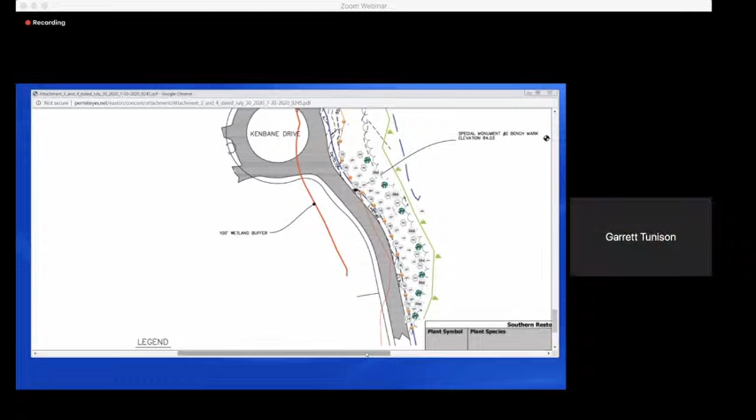Yes. So for mulch, maybe something double shredded and something that's not recycled construction debris. Yeah. Okay. Very good. No further questions. Thank you. You're welcome.

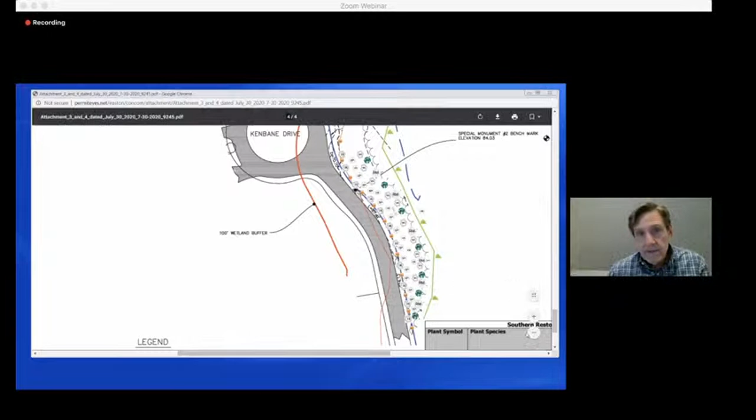Any other questions from the commission? Any public comment on 7 Kenbane Drive? Either raise your hand or submit a question in the Q&A. My goal here would be to find a way to condition this so that we don't have to have them come back again. This is already their second hearing on this issue. So I would like to try and condition this in such a way.

Carol, did you Mullin this or no? No. Okay, so you're not eligible to vote here. So, any suggestions on the conditions? So we want to monitor for invasives, which I believe is in your report, correct, Garrett? Yes, that's correct. Do we want to add something about mulching the trees in some manner?

Any thoughts from anybody? I mean, I'm more on wanting the results. It seems to me Garrett's incredibly invested in having this be a successful project. And Garrett's done dozens and dozens of these in Easton, so he comes with a pretty good reputation. I'm not suggesting he gets a free pass, but we look at his restoration plan report, and it's pretty darn detailed.

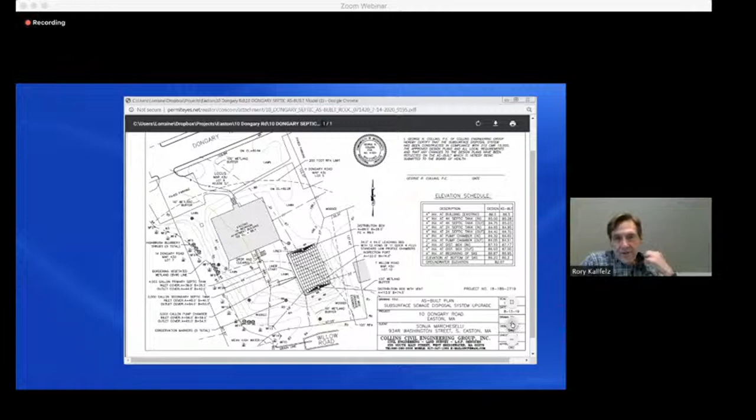So without either the applicant's representative or the applicant here, it's hard to know. I mean, I don't know that the permanent markers are going to make or break this particular thing, other than it's a condition that wasn't met, which is a concern. I mean, do we push and give them a week to have somebody? Yeah, since we have a meeting next week, why don't we just continue this to the 10th until we get some answers from them? Maybe they can tell us where they are, or send us a picture or something.

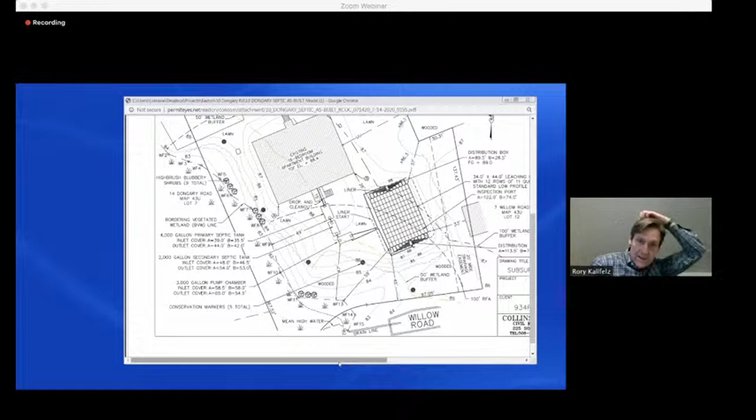Exactly. Can you give me some guidance on the blueberry bushes? Same thing, if they can send us a picture of the rest of the plantings. So they owe us 9 blueberry bushes. Okay. I think we held 19 Lullaby to that standard. So I think we need to hold these guys as well. Agreed.

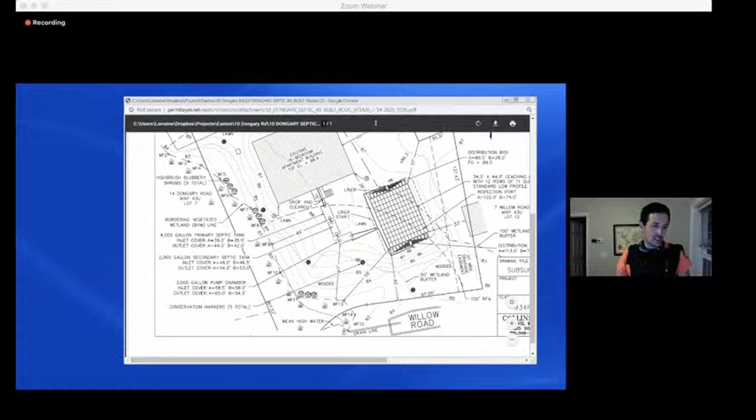So any public comment on 10 Dongary? My apologies. I was talking to him about another project just the other day. Rory, do you see any hands raised? I'm guessing not. No hands raised. All right, I'll make a motion to continue 10 Dongary to August 10th. Spady, second. Whoop, hit it like a flash. So that was Spady a second for the record. Got it. Kallfelz, aye. Lundin, aye. Spady, aye. Thomas, aye. Catino, aye. Easy.

Okay, so minutes. Anybody have anything for the minutes? No comments. Nada. Top notch. Nice job. So I will make a motion to accept the minutes of July 13th, 2020. Catino second. Roll call vote. Kallfelz, aye. Lundin, abstain. Spady, aye. Thomas, aye. Catino, aye. Okay.

And next up is environmental planner updates. Not a lot going on. Oh, the water department has, I'm pulling them up now. Okay, so the water department has put in the concrete pad. They're waiting for DEP approval. Oh, do you know I'm talking about the Wheaton Farm Barn? They will put in a visual barrier along two sides to block it from the street. They said if you'd like, they'd do a 6 foot high cedar fencing or expand the lilac bushes. I haven't actually been out to look at it, so I don't know which is better. Anybody have any ideas which one would be better?